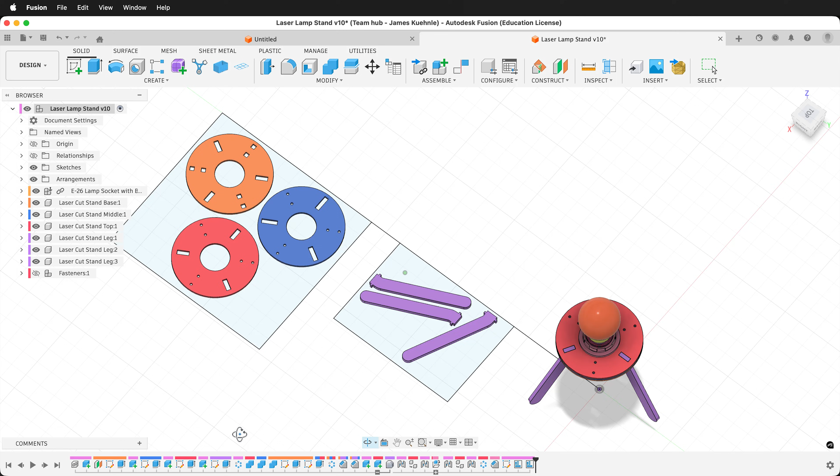This Autodesk Fusion tutorial will show you how to arrange parts for laser cutting to lay flat, and it'll show you how to do that with two different arranges. The reason for that is if you look at this laser cut lamp stand, I have 6mm stand legs and 3mm supports in the middle.

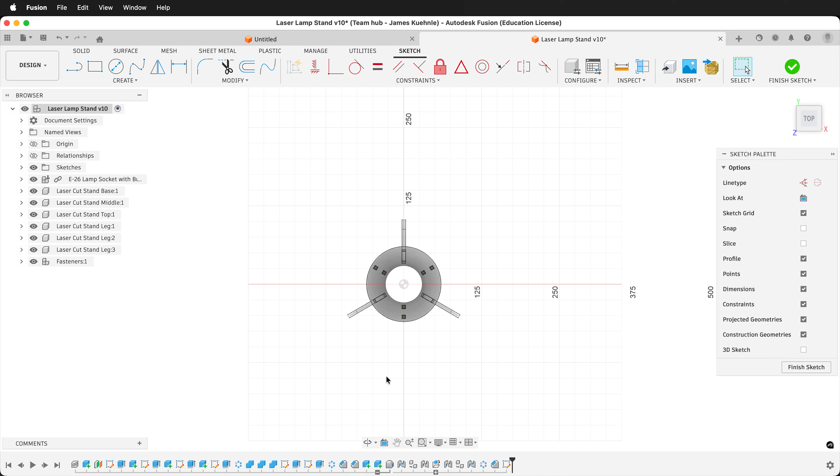To create a layout, generally it's a good idea to create a sketch right on the ground plane, and then we need two sketches for two layouts. So I'll press R for a rectangle. These rectangles don't need to be precise yet, they just need to be big enough. But we'll do some dimension constraints. I'll make both of these collinear to each other.

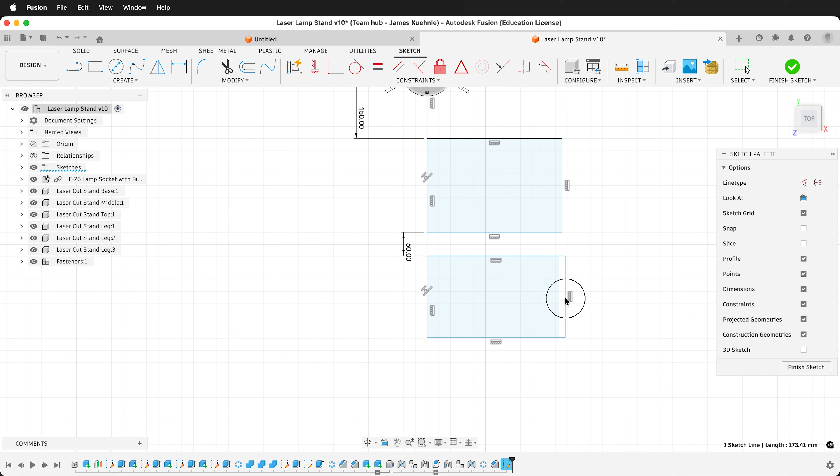Press L and I'll draw from here to here. And then I'll draw from the origin to here. Make these vertical. Press X, make both of these construction lines. And then I'll give these just some round dimensions. From the origin to here, about 150. And then from here to here, we can just do 50. That just helps lock those into place, and then I can make these just big enough for the arrange.

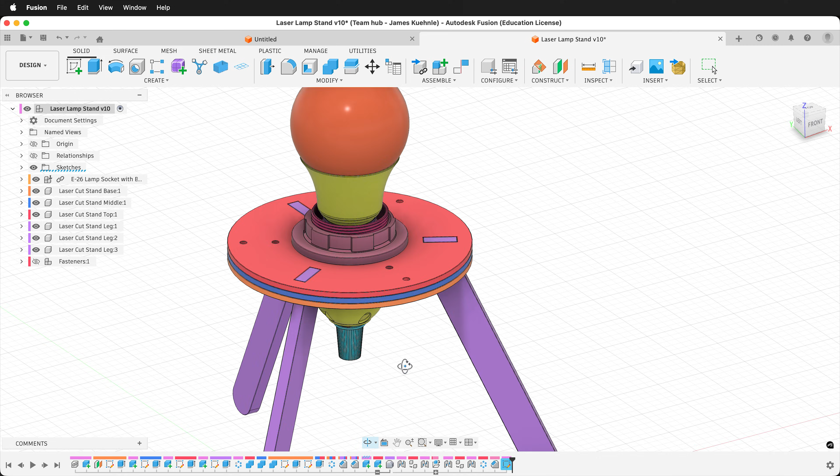Finish the sketch. Now, it's really hard to see through this. I've applied a clear material for rendering, so I can go to Inspect, Display Component Colors, and now I can see everything as their individual components. I have all these fasteners that can be confusing, but I have them in their own component assembly, so I can just hide them. Then we need to arrange these pieces on the ground.

Click Modify, Arrange. First, let's go ahead and arrange the legs. So in the Arrange tool, it says Objects and Envelopes. The objects we want are these legs. Then the envelope will be this envelope right here, the sketch. And you can see how those are laid flat. We can go ahead and press OK.

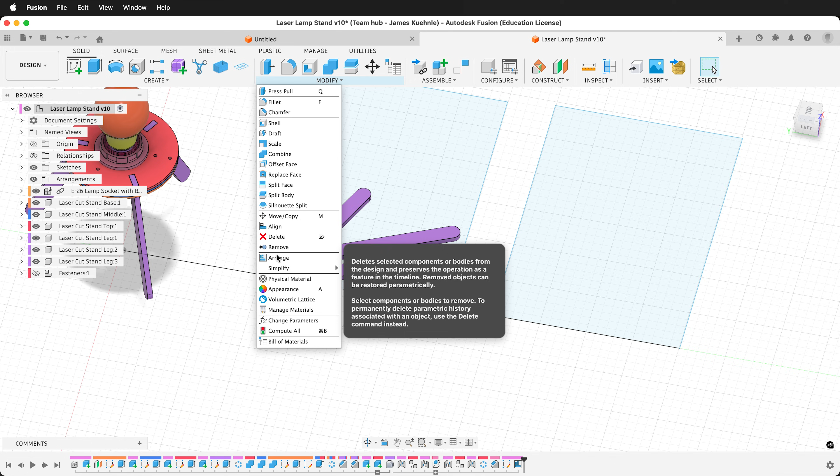Then we'll go ahead and say Modify, Arrange. This time, the objects will be all of these pieces right here. Sometimes Fusion is smart enough that if I marquee select just like that, then I select the envelope, it'll lay everything flat. But notice that there's not enough space. That's okay, we can make the sketch bigger. Press OK, then just drag this sketch line out until they all fit.

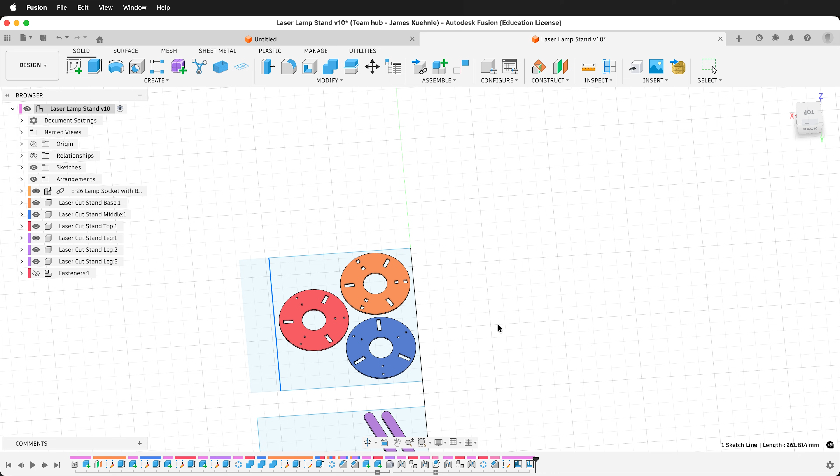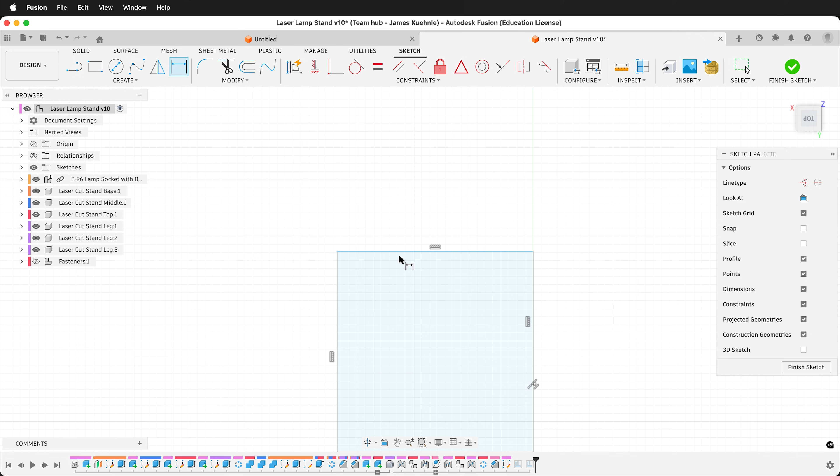And that's why we haven't dimensioned these yet, so now I can move this over to where it's close enough to be the smallest piece possible. And I can bring this one over to be the smallest piece possible. Then right-click, edit that sketch, and give these nice round dimensions because you need to cut these out of your material. Press D. Select here, I would say 145, 199, so round up to 200. This one here is 243, so again, 245. And then this dimension, 261, so 262.

Finish the sketch. And now we have these laid out, flat, ready for laser cutting. We also have the thick parts on one platform and the thin parts on the other.

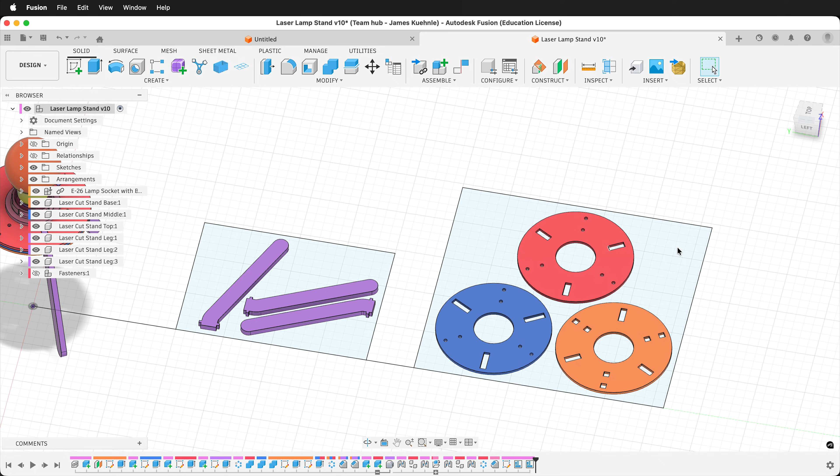Now, the Arrange tool is only available in some of the licenses of Fusion. But you can do this with planar joints. Instead of having these sketches, just extrude down, make a solid right there, and then make planar joints. And then you can easily move these pieces around to have them all flat. It doesn't do it automatically, but it only takes a couple more minutes of work. So you can use this same process.